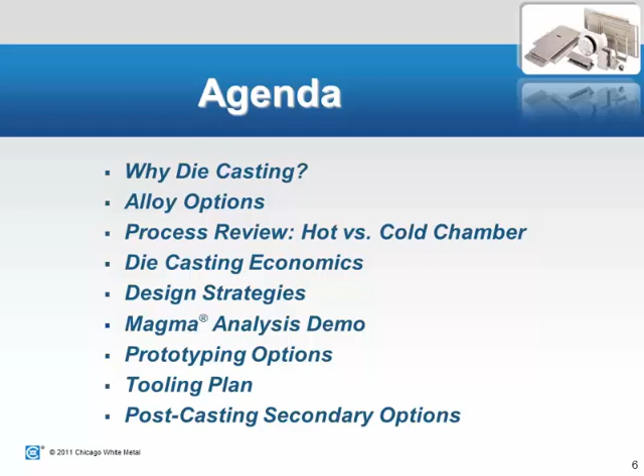If you look at why die casting, there are a wide variety of alloys available. The three main families of alloys that we talk about are aluminum, magnesium, and zinc. There are various alloys within each family that we'll look at a little bit, but those are the main three. There are other metals that can be die cast, but those are the ones that are overwhelmingly most common in the industry, so we'll talk about those.

They have a good range of physical and material properties. We'll look at some of those. We have links at the end of the seminar or webinar where we give some literature and documents about more specifics of the physical and material properties that we'll give you.

Die castings produce a net shape or as close as possible component. That's one of the biggest benefits of die casting versus other types of castings - investment castings, sand castings, permanent mold, those type of things. The goal for a die casting is to give you right out of the tool as close as possible the shape of the part and dimensions and tolerances you're going to need. The less we touch the part after it comes out of the casting, the better economically it's going to be for you.

A single die casting can replace multi-part assemblies. Another great reason to look at a die casting is if you have some sort of steel part or other assembly that has fittings on it that we can convert to a single part die casting. That is obviously a cost save all around and makes a nice part.

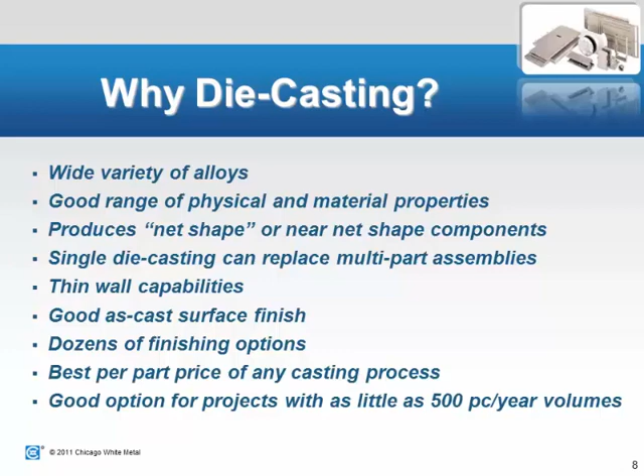If we look at the various material selections and alloys available, like I said, there are basically three families of metals that we talk about. Aluminum alloys - we highlight here aluminum 380, which is the one that Chicago White Metal works with, but there are numerous others in the aluminum family. 380 is the most common of all the aluminum alloys used in die casting, so we focus on that one.

Aluminum has very light weight, excellent strength properties, and excellent thermal and electrical properties. Many people use aluminum 380 for heat sinks and that type of application. And it is the lowest cost per unit of volume. We talk about cost here in a little bit, but when you look at the price per pound of aluminum and its weight, it becomes right now the best cost per unit volume alloy.

Magnesium. The magnesium alloy we have highlighted here is AZ91D. There are other alloys available, but this is the alloy that Chicago White Metal uses. It is the lightest weight of all the die casting alloys. It's about two-thirds the weight of aluminum, so about one-third lighter. It's a similar weight to most common plastics, so many people look at converting from plastic to magnesium if they need a little extra strength they can't get from plastic without much increase in weight. Magnesium is a great option.

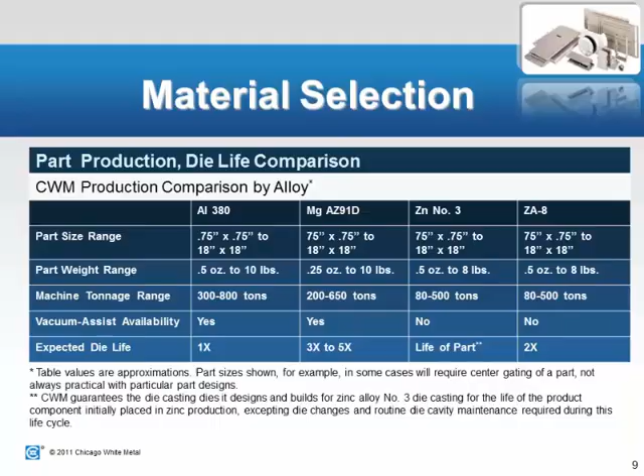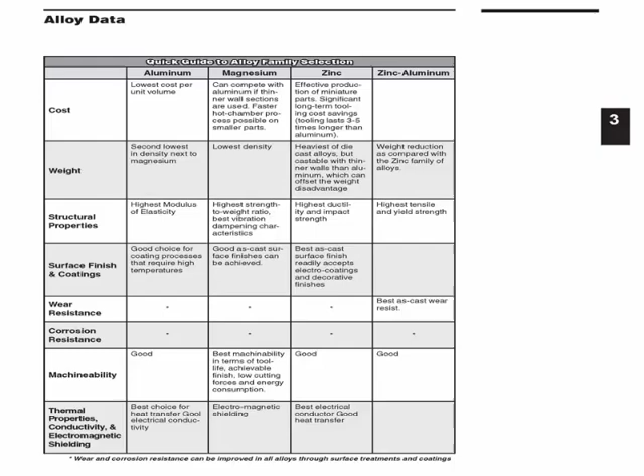This chart breaks down the various material properties of the alloys we talked about. This specific chart will be available to you, so don't worry about memorizing everything on screen. We'll send out a link at the end of the presentation with this exact chart, giving you all the different strength characteristics and densities of each alloy so you can compare them.

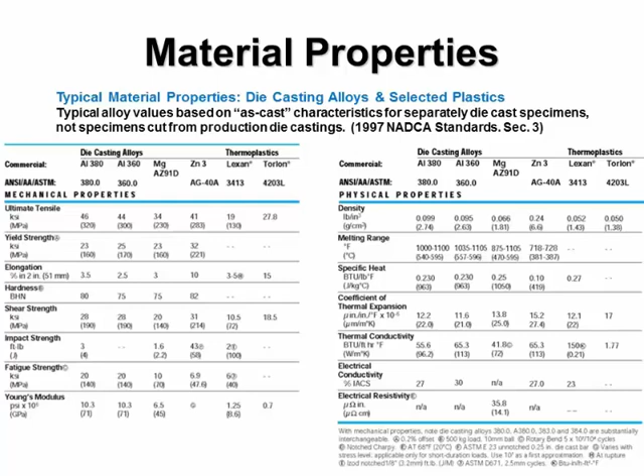Next, let's talk about cold chamber versus hot chamber processing of die castings. You hear these terms thrown around in the industry, so it's good to understand what they are and the differences. When we refer to high pressure, or die casting in North America, that relates back to the high pressure die casting process. It differentiates itself from other casting types like sand casting, permanent mold, and investment casting, where the alloy is poured by gravity and is not under pressure.

In our process, in the high pressure die casting process, the metal pressures can get up to about 20,000 psi. So when we inject the metal into the die, it's extremely high pressure, and that's what allows us to get the thin walls and the features as cast in net shape as we can. That's kind of why that lends itself.

The two processes we talk about are cold chamber and hot chamber. We have a little animated clip coming up that'll show this in motion, and you can see a bit different about the differences. The hot chamber process is used for the lower melt temperature metals, so zinc, ZA8, lead, which we don't cast but is there, and small to medium magnesium parts. Those are hot chamber applications. Cold chamber is for the higher melt temp metals, such as aluminum, brass, and the larger magnesium parts.

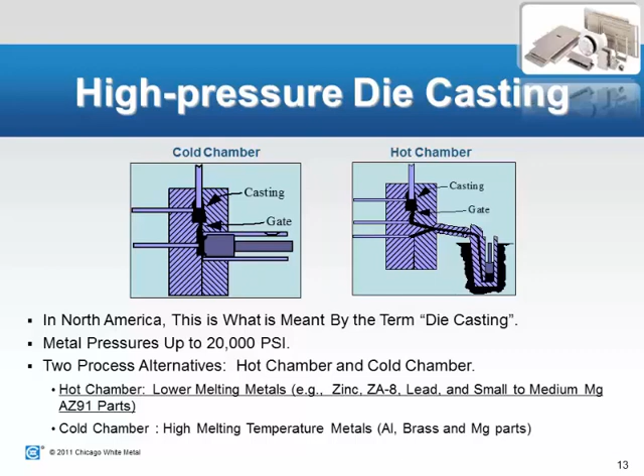Here you can see an example, or a pictorial, of the cold chamber process. Conceptually, it's pretty easy. You have an amount of, in this case, aluminum or magnesium for a cold chamber outside the machine. A ladle goes in and scoops a given amount of metal, pours it into the plunger area, and then it's shoved into the die at very high pressure. So conceptually, it's pretty easy to understand how die castings work. There are many other factors that go into it, but as you can see, the metal goes in, the part solidifies, the tool opens up, spits out a part, and is either ejected into a water bath or extracted and air dried on a conveyor.

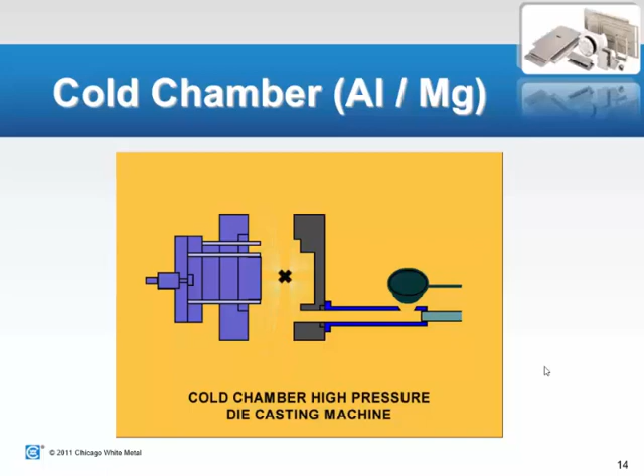Again, cold chamber die casting is for the aluminum, larger magnesium, and the ZA family of alloys that have the higher aluminum content, the 12 and 27% aluminum. Some of the advantages: it allows us to process larger, more complex parts in this process. It allows for higher metal pressures, which gives improved quality when we have heavier wall section parts, usually in the larger aluminum parts, as well as pressure-sensitive applications. There are times when an application will need to be leak tight or have an internal pressure, and the cold chamber process is an advantage for that.

Some of the disadvantages: there is a greater chance of entrapping air during the shot, and it's typically a slower cycle time versus hot chamber. So it adds to the economics of the process.

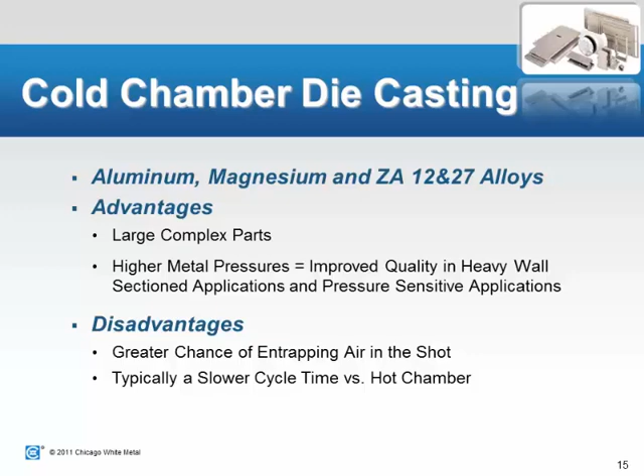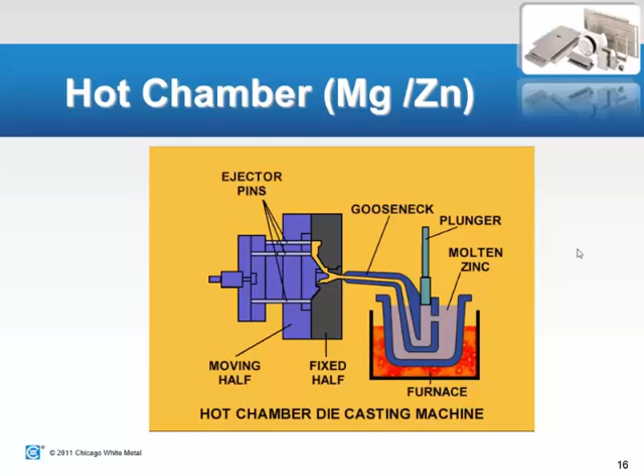The lower temperature alloys, such as zinc and magnesium, can run this way because it's not as aggressive on the injection system, and that's why it's buried inside there. But the rest of the process, from the tooling and how the part cycles in the tool, is the same. The biggest difference is, like I said, how the metal is physically brought from the molten area to the tool.

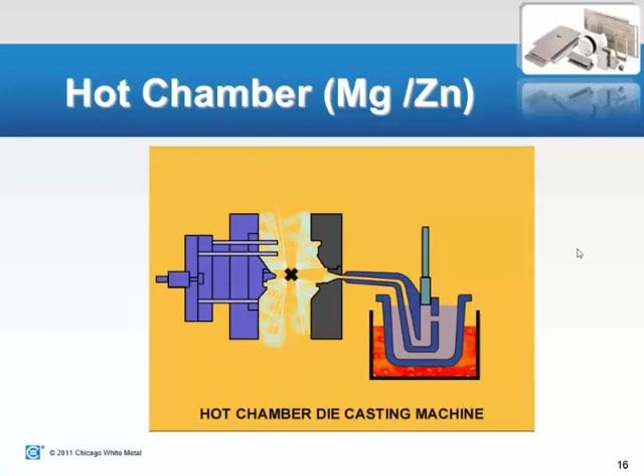So hot chamber die casting, again, it's for the lower melt alloys: the AZ91 magnesium, the zinc family of alloys, as well as the ZA8, which is the 8% aluminum alloy. So it doesn't have enough aluminum to push it to the cold chamber.

Some of the advantages: we're able to control the metal temperature better, improve filling capability of the thin wall castings, reduce porosity because of the way that it enters the tool and is able to fill the thin wall. We're able to control porosity better. And as I mentioned before, it's typically a faster cycle time than the cold chamber, which helps with the process costs.

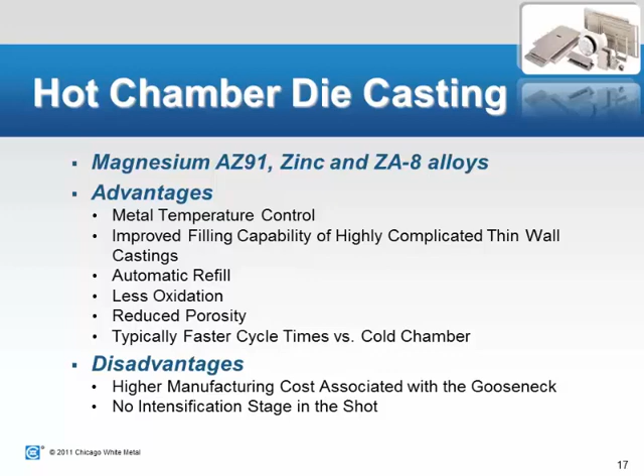Some of the disadvantages: the gooseneck that you saw in the animation, which is the mechanism from which the metal gets into the die, that system is a little more expensive than the cold chamber setup, but not significantly. And there's no intensification stage in the shot, so we're not quite able to get as high pressures as it goes in.

Some of the price factors that go into making a die casting. These are what go into it when we build a quote for a customer. Obviously, metal costs: each alloy that we talk about has a different price per pound that fluctuates throughout the year. We show a snapshot of that coming up in the next slide. The processing costs, the labor amount goes into it. The size machine that we're running a die casting in will add into the overall cost. The various cycle times for a component.

Some of the larger parts with thicker walls and that type of thing might have a significantly longer cycle time than a smaller application. The number of cavities that go into the tool also matters. If it makes sense to put 2, 4, or more cavities into a die, we can do that, and that can save on processing costs as well as automation options.

The casting process is relatively automated, and we try to maximize that as much as we can.

The post-processing costs, again, are varied. The part comes out of the die and goes down a conveyor, and then has to get the gates and runner system trimmed off in a secondary operation, so that factors in. And then there's the various finishing that's available.

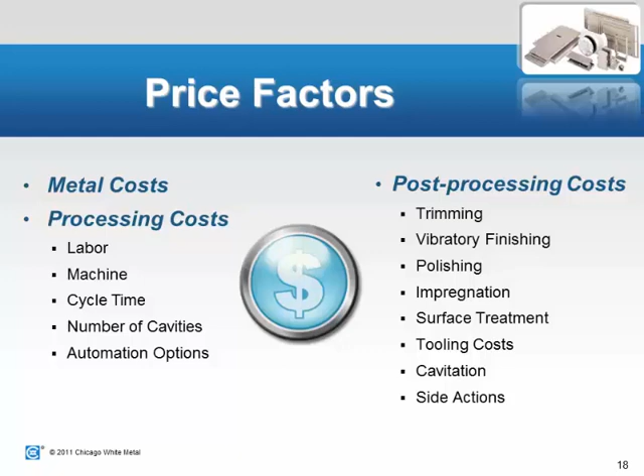We show the larger bar as the actual cost per pound of the alloy itself. For magnesium, right now the cost is about $2.25 per pound. Aluminum is about $1.25 in that area, and zinc is about $1.05.

So that means something, but it doesn't mean as much as when you factor in the cost per cubic inch or the cost per unit volume. So that's why we show a second bar here that shows, when you factor in the density and actual weight of the alloy, how that comes out.

With the metal prices as they are right now, aluminum is slightly better than magnesium for cost per cubic inch, as you can see by the two bars. Zinc is significantly higher cost per cubic inch because, as we mentioned, the weight of zinc is about 2.5 times that of aluminum. So there are things we try to do to factor that out.

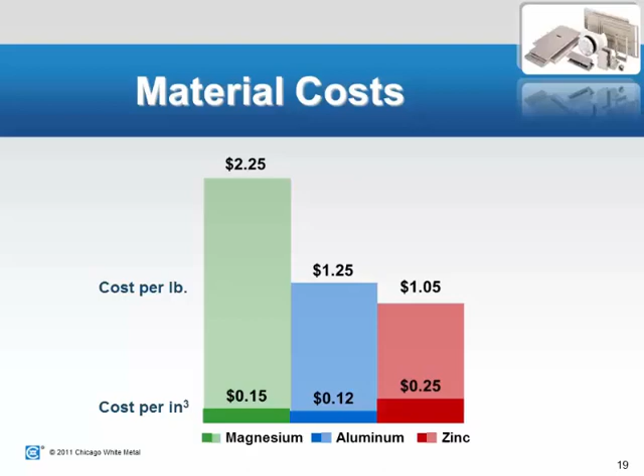If we can design out some of the wall thicknesses to make them thinner, that will help with the zinc cost per cubic inch part of it.

So now if we go through a few case studies of projects we've worked on in the past with customers to show the benefits of die casting. In this picture, you can see a manifold type part.

It started life as an aluminum and brass assembly. You can see where the aluminum part would have been, and then 5 or so different fittings that were brazed in place. So it was a pretty costly assembly for this customer.

When we worked with them, we tried to see if we could convert this over to a single piece zinc die casting, and that's what we ended up doing. All the threads that you see here are as cast.

There's most likely a small flat area that we have to include in order for the part to get a gate there. Maybe not on some of these, but typically we'll put a flat in an area so we can gate into the thread. But external threads are an option, and that allowed us to make this part as a single piece die casting.

Obviously, it was a huge cost save for the customer, saved about 85%, and the payback on their tool was very, very fast.

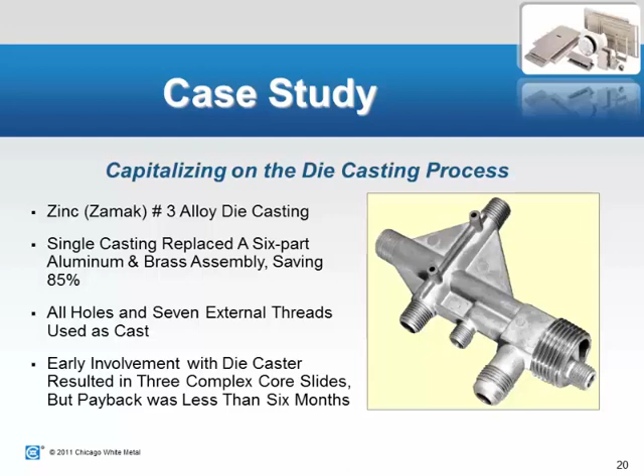This next component was a printer - a printer cartridge, printer carriage component that started out as a plastic piece with some threaded inserts molded in. The customer indicated that the overall strength of the part was not exactly what they needed, but they didn't want to sacrifice very much weight in the overall product by converting to something.

So magnesium was a great choice for this. It gave them the strength they need. The weight did not change that much. They could remove all the different brass and steel little inserts that you can see in the plastic part, and that allowed a good cost saving as well.

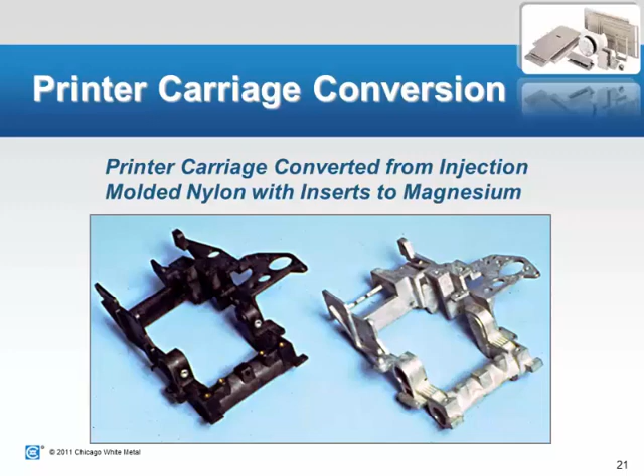This next conversion case study involves very, very small air chuck screw machine brass parts that were converted over to what we call mini zinc die casting.

There's a whole separate process surrounding the mini zinc process. These components are run in extremely small, extremely fast die cast machines. In fact, these parts probably run something in the 20 to 30 cycles per minute range, so very, very fast. These things are spitting out almost like popcorn out of the machine.

So it's a great option for parts that are small. Obviously, these parts have to be small to run in these machines, and there's a lot of conversion activity if you're screw machining brass like these parts were, or steel or other things that can be converted to zinc. There's usually a very significant cost save to do that. In this case, the annual savings on these parts were about $85,000, so very significant.

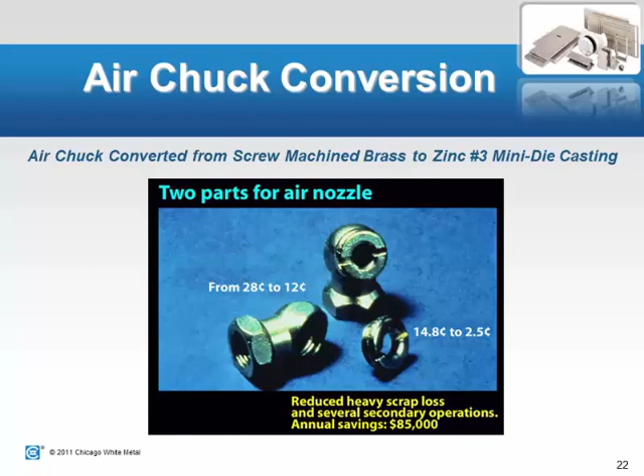This next application is a microwave splitter. It is a very low volume requirement part. It started life as a machined from solid part, which you can imagine with all these internal features and different things going on, that was a challenge and very, very costly to do as a machined part. Converting it to a die casting, even though it required several pretty complex slides to form some of the features and some post-casting machining to touch up some of the features, it still was a significant cost savings over machining from solid, and allowed the customer to see a payback on their tooling investment in very, very fast order, even though it was a small quantity that they needed per year.

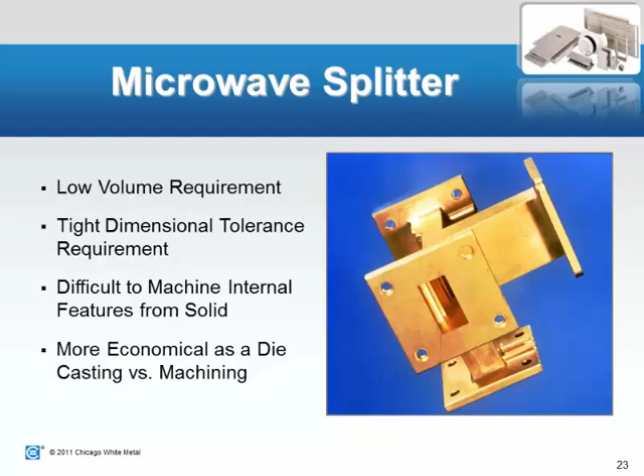This next project, you can see it's a handheld or shoulder-mounted video camera. This highlights the number of components that were used in this application. There were 11 die-cast parts that were used. You can see the non-coated parts in here. The more structural parts are aluminum, and the majority of the exterior parts are magnesium.

Most of the parts, or 5 of the parts, were cast net shape, so there were no other secondaries required on those. Some of the other parts received some drilling and tapping, but for the most part, as they came out of the die, was good enough. The outside components that are magnesium were mostly specified that way because of the EMI shielding that were required for this application, and the magnesium did a great job of providing that.

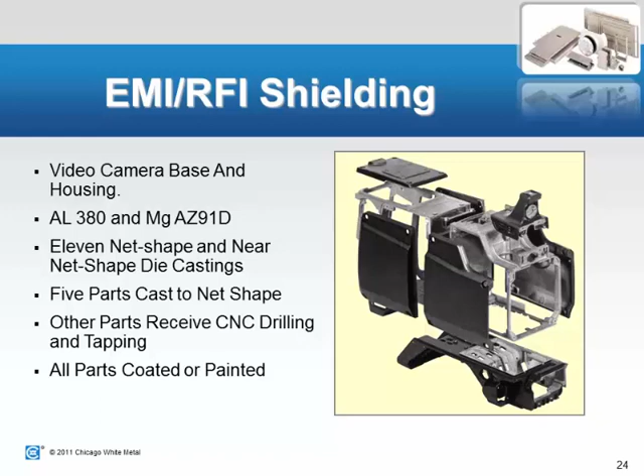Okay, if we look at some of the die-cast tips or design tips that we would recommend, again, these are things that we look at when we first get a project, and they may seem a little simple, but they actually can have a big impact on the price and quality of the part.

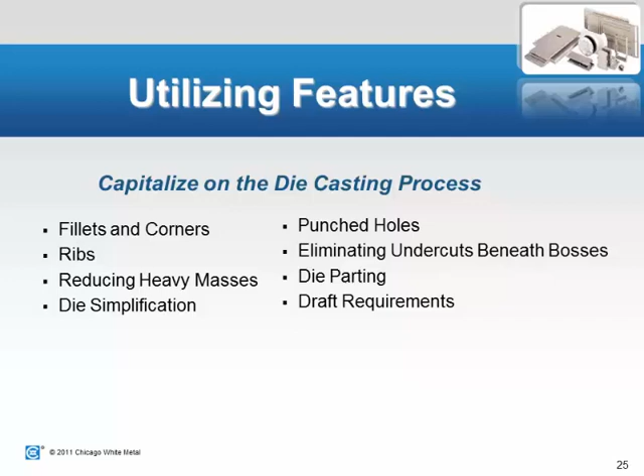The first thing we look at when we get a new project in is are there areas that we can remove some of the mass of the material. You see in this diagram on the right, there's a boss that comes in, and then there's a heavy wall section that's underneath the boss. Heavy sections are areas where porosity may creep in. It also adds unnecessary weight, which is cost into the part. It causes us to have a slower cycle time in the tool, which again factors into the cost. So if there's any areas that we can recommend a customer take out weight or do some things to reduce some of the overall weight of the part, it's a big advantage all around.

Die castings don't necessarily have to have a consistent wall thickness throughout the entire part, like plastics or other things are recommended to be. But it's still a good policy if that can be done, that's great. It leads to a little better metal flow and some other characteristics that are an advantage.

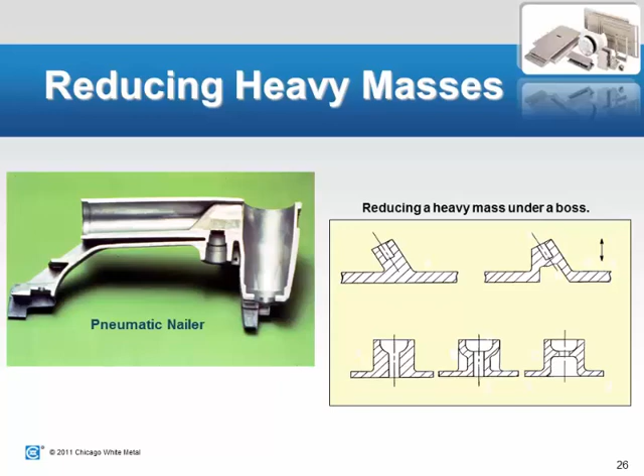Again, in this slide, we try to ask a customer to use ribs wherever possible instead of maybe a heavy mass area. Ribs do a couple things. They help metal flow from one section of the part to the other. They also increase the strength of the part as it comes out of the die and in application. So ribbing is a good thing for die castings wherever possible.

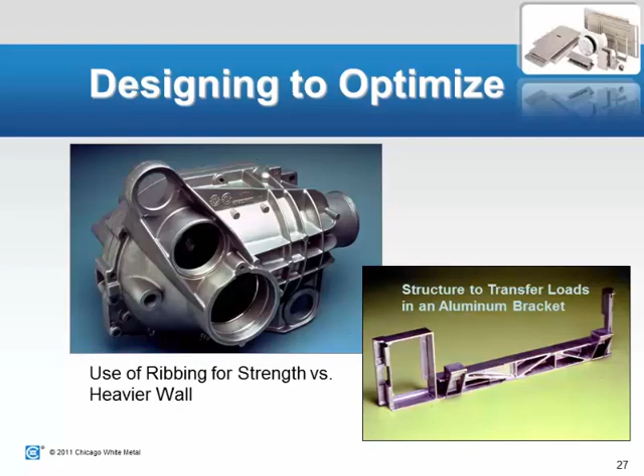Fillets and corners, again, that seems like a simple thing, but you'd be surprised how many times we get an application that has very sharp corners or very little radii in the corners, and that's bad on a couple of levels. First, it could create stress points on a component and lead to premature failures. The biggest thing for us is that being able to have generous radii in the corners allows the metal to flow better. When liquid metal goes in and tries to fill a cavity and solidify, it does not like to try to do that around a sharp corner. So anywhere there can be radii factored in is the best.

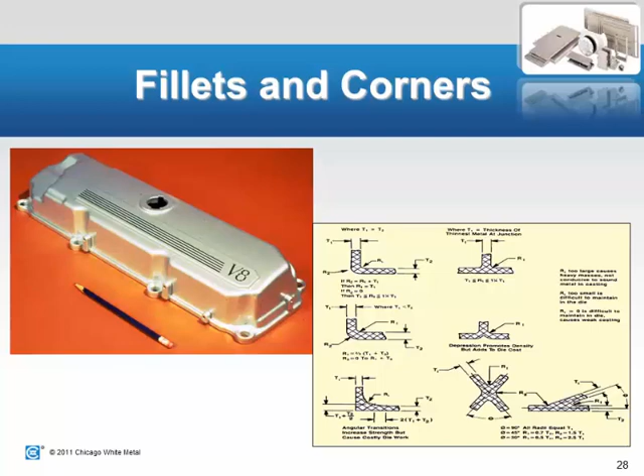Draft is another thing that we'll look at when we first get a new project in.

Draft is going to be required on pretty much every feature that we need in a die casting. What happens is, as the part solidifies, the metal will shrink toward the inside of the part and onto a tool. So we will need some draft on the features in order to get the tool apart and to eject it from the die.

Interior features need about 2 times the draft of exterior features. So as a general rule, we'll ask for about 2 degrees of draft per side on the interior features of a part and maybe 1 degree on an external feature. Obviously, more the better for us to properly get the tool apart.

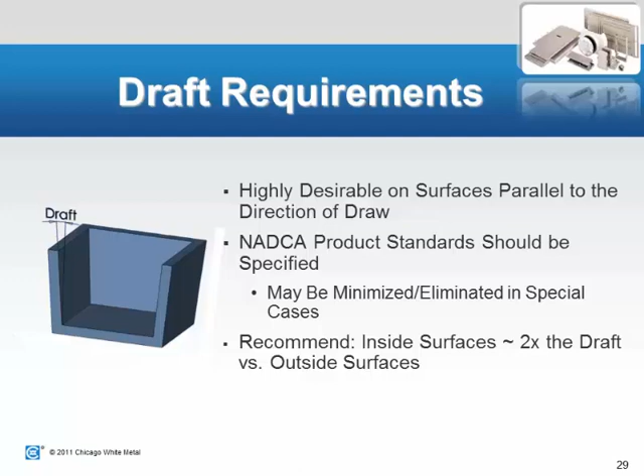Sometimes customers are limited on what they can do from a draft standpoint, which we understand, but we do request as much as you can give us. There are areas or times where draft may be minimized or even eliminated. Those are kind of special cases, but there are times when that's something that needs to be done.

Prototyping strategies - another common question we get is, how do you prototype a die casting? Obviously, people don't want to spend the investment on a brand new tool just to get some prototypes. So what are the other options that are available?

We can do a single cavity hard tool. What we mean by that is, if there's going to be in production, say, a large 4-cavity die, maybe we make a very small single cavity die instead in order to get some prototype or maybe even some pre-production parts off of it.

We can also do a single cavity soft tool. We can utilize a tool steel that's not hardened up to what we would use in production, and that's typically good for, say, a couple thousand parts, maybe a little less depending on the application.

Rubber plaster molding is another great option that we suggest to people when you need maybe 10 to a couple hundred parts. That's a fantastic option. There are companies out there that we work with and recommend for that process.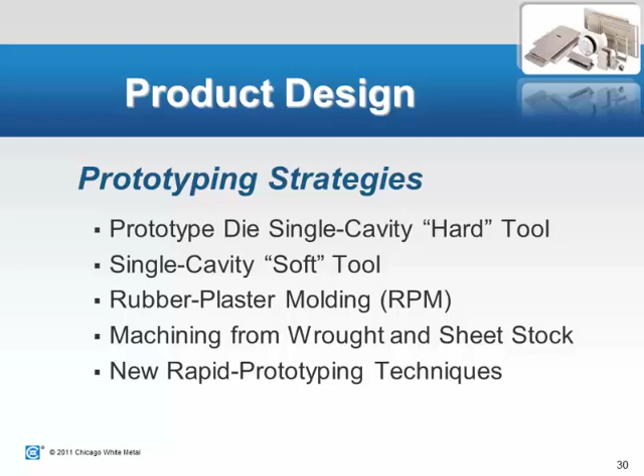There's machining from wrought and sheet stock. This is usually done for smaller quantities. If you just need a couple of parts to touch and feel and show around, then that's a very good option. And we're also looking for new rapid prototyping techniques - there's always new things coming up, and so we try to stay on top of the new things out there.

If we consider what the tooling construction cycle is, as we get a new project in and we are working with a customer, once we get the final model from a customer, we'll construct a rapid prototype called an FDM, Fused Deposition Model. It's a machine we have in our engineering facility in Chicago, and it's great to be able to just make something very fast, to show to the various departments that are going to be touching the part, and to show to outside vendors if necessary what the part's going to look like.

It's very helpful. We'll then perform a design review with the customer, going back and forth on tolerances and anything that might be able to be changed or modified to help the part or solve some issues that we can solve ahead of time. Then we go through a MAGMASOFT flow simulation on every new project.

In a minute, we'll show you a case study of MAGMASOFT and the advantages we see of this. Again, we do this on every new project. It's not something that's typical in the die-cast industry for other die-casters to do on every project, but it is something that we find extremely valuable and recommend for every new project.

Once that is all complete, we'll subcontract a tool maker. We do not build dies in-house, but we've got a fleet of people that we utilize to build our dies, both domestically and offshore. We'll then do a tool design review with the customer to make sure that they're happy with how the tool is designed.

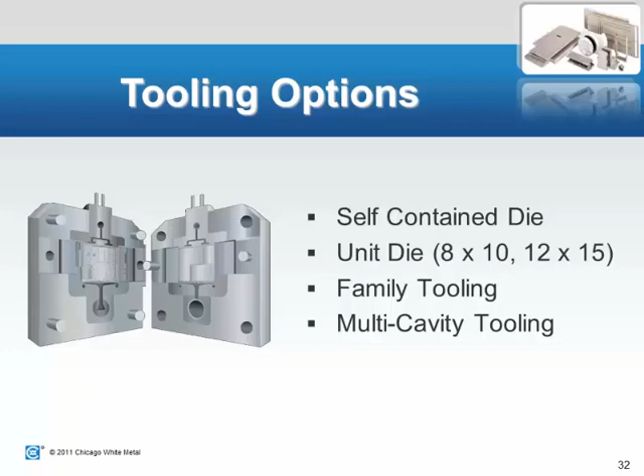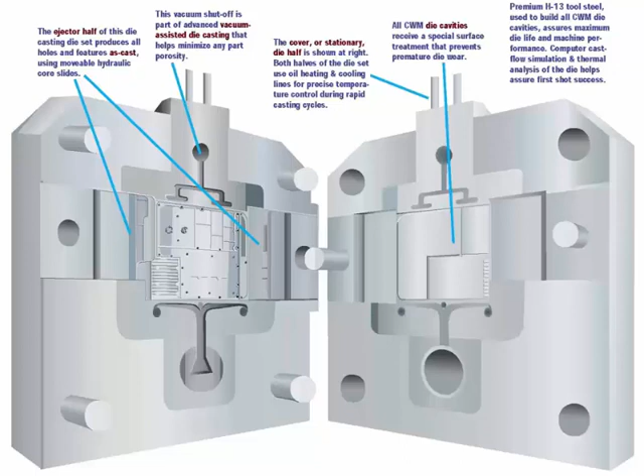Internal porosity is obviously a big thing that's desired to be controlled, so we do whatever we can to achieve that. The tool steel that we use is H13, which gives us the maximum die life and machine performance that we can achieve.

All of these exterior holes that you see, we attempt to get as cast, depending on size and functionality, instead of having to go in as a separate secondary operation. Any type of indications such as part numbers and logos and that type of thing are easy enough to put in the tool ahead of time, so those can show up on your part as well.

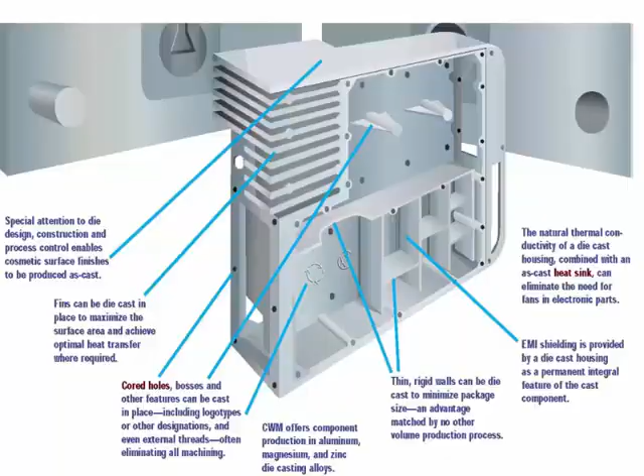Okay, next we'll step through a MAGMASOFT case study. As I mentioned, once we get a new project in, we'll work with the customer to go through this MAGMASOFT project or analysis with them.

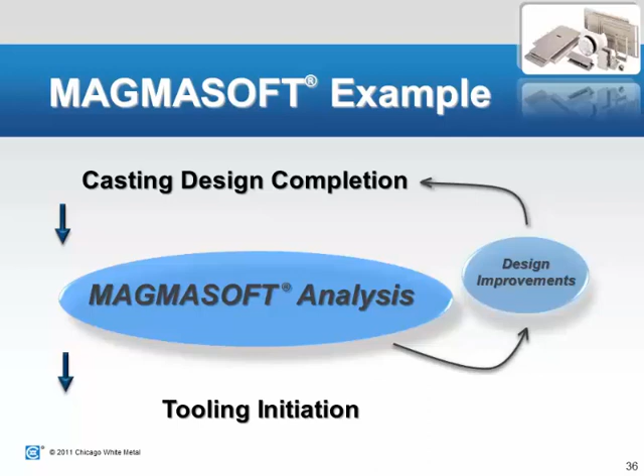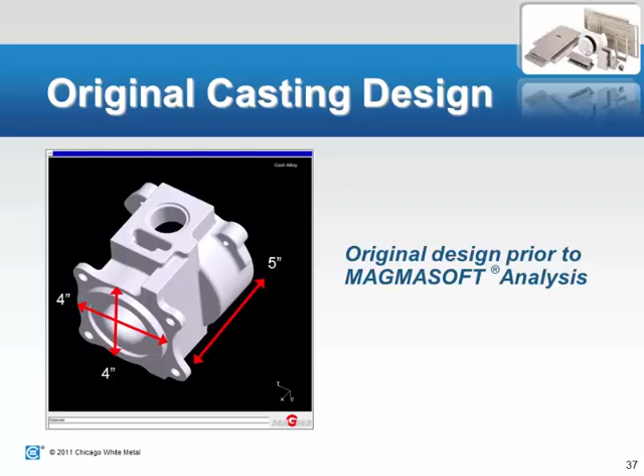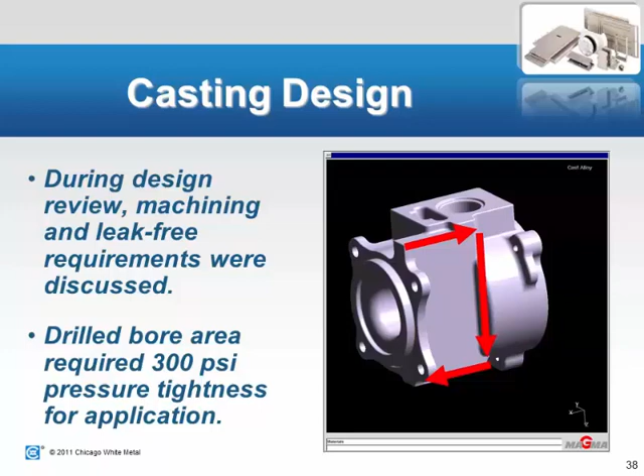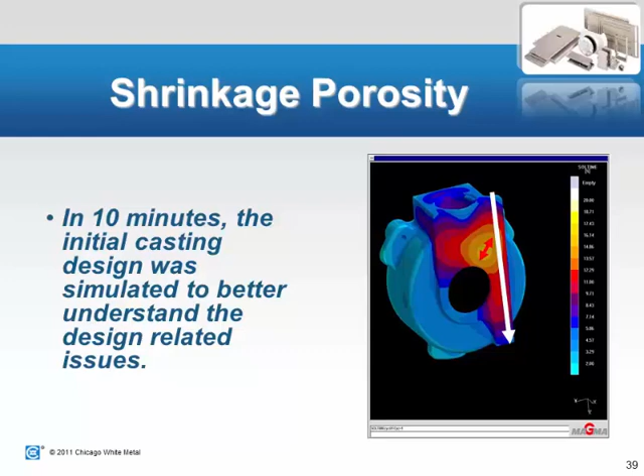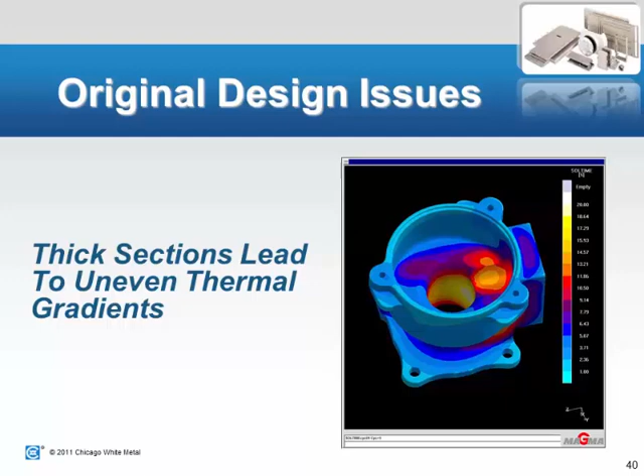Another view of the part from above, and you can see again the thermal gradients based on the thick wall sections. The uneven thermal gradients lead to distortion, and that distortion can lead to stresses that remain in the part after it comes out.

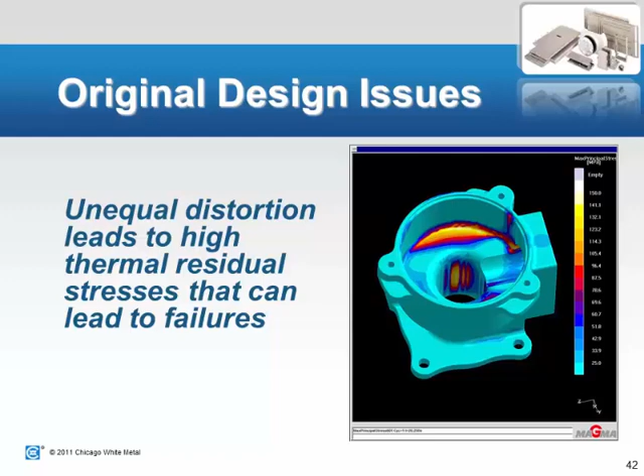So the things that we did to work with the customer to try to redesign and improve on the design, as you can see in this slide, there's some metal taken out in a couple different areas. You can see this section on the left where my pointer is, that was completely solid, and then we came back in later after the analysis was completed and put a long slide in there that took a good bit of material out, as well as a slide from this direction which took

another big chunk out. The other thing we did was where the bore for the pressure tightness was going to be positioned, instead of machining that completely out, we cored out the majority of that first in the die, which was a big advantage.

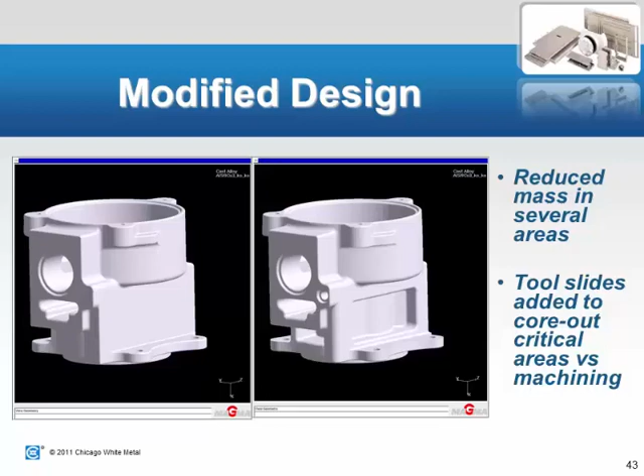So when you see the results in this slide, no longer do you have the bright yellow and red areas. It's a much more even solidification picture. So the entire part is solidifying fairly consistently.

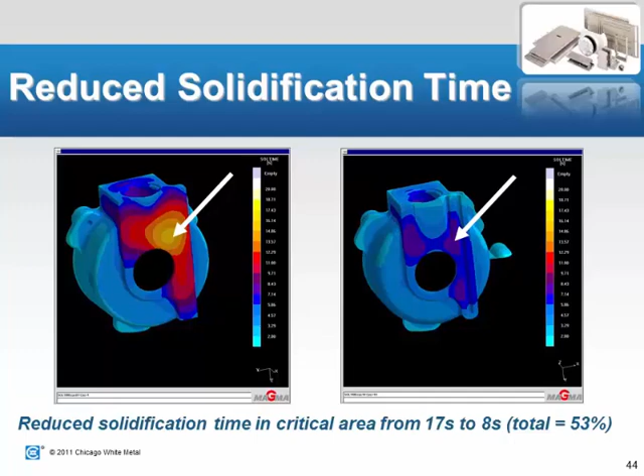The next slide shows what we do after we got the design completed and finalized. The MAGMASOFT software helps us identify the best way to gate the part. As you can see, the metal's flowing in and then gets split off in a few different areas to help fill. And then once the metal gets all the way to the other end, it gets pushed out these little small overflow areas that are here. So all the entrapped air and other undesirable things that happen during the shot are pushed out to the end.

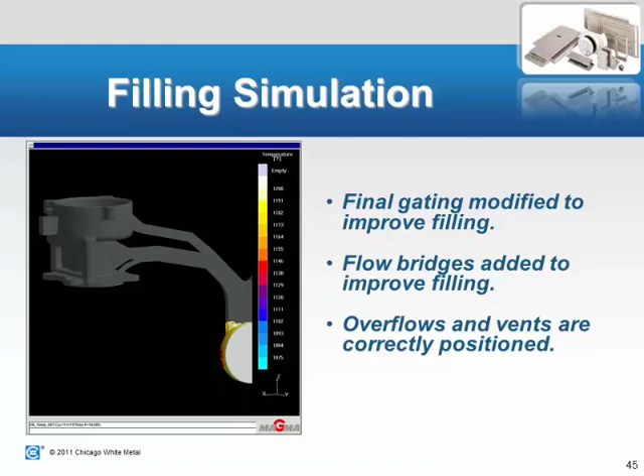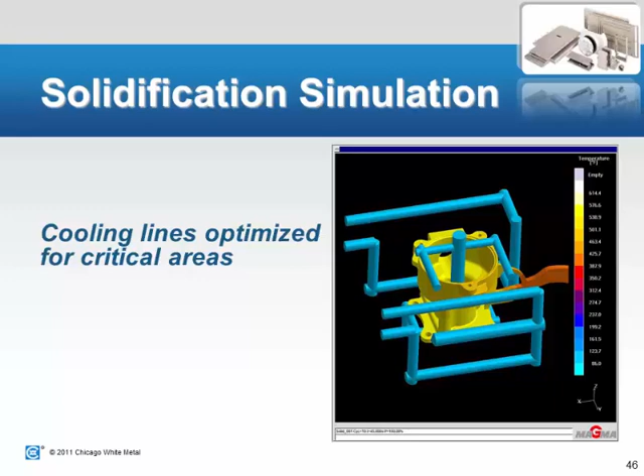In addition, the MAGMASOFT helps us identify where the cooling lines are going to be located and optimizes that for the different areas of the part. If there's some areas that are thicker or require more cooling, then the system helps us identify that.

So in conclusion, obviously initially we saw the issue with the pressure tightness requirement in that area. The complete analysis fit inside the 2-week engineering and design lead time frame that we typically give for a MAGMASOFT process. And the first castings right out of the chute were good and have had no defects to date. So as you can see, it's a very, very powerful tool that we utilize, and which is why we try

to do it on every project. It's a huge advantage being able to identify things up front instead of having to wait till the tooling is completed.

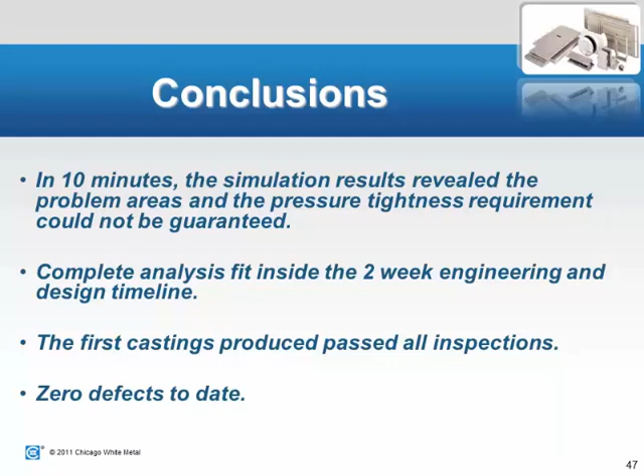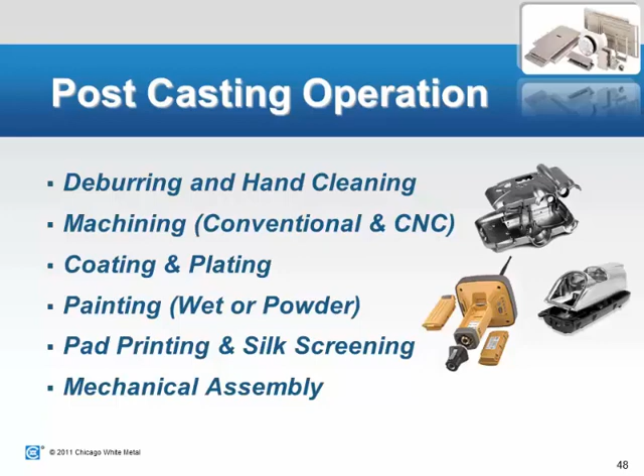The various surface treatments that are available, we don't go too deep into what is available in this webinar. We're looking to provide you some technical data sheets after the webinar is completed that will have details on other options that are available for surface treatments. In addition, we're looking to potentially have a separate webinar just on surface treatments. I know that's a very hot topic for a lot of the people attending, and we're looking into that.

Obviously, surface treatments provide a decorative finish based on whatever the cosmetic requirements are, as well as providing a protective barrier for the different levels of protection that are required. Some applications are fine as cast - the application does not need any coating - but the majority of parts do get some sort of coating.

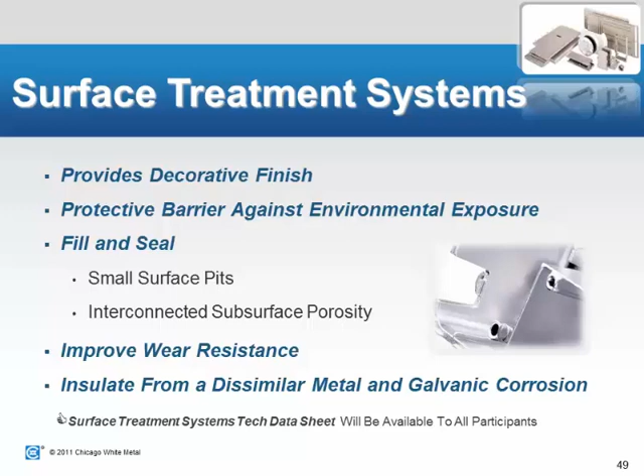And again, we'll provide some other information to you. For surface treatments, the best thing to do is really give us a call. We'll kind of step through what's available. We'll look at the application with you and see what you're trying to get out of a part, what the cosmetic requirements are, what the corrosion protection requirements are, and we can really work with you with providing samples and other options that'll get you something that you

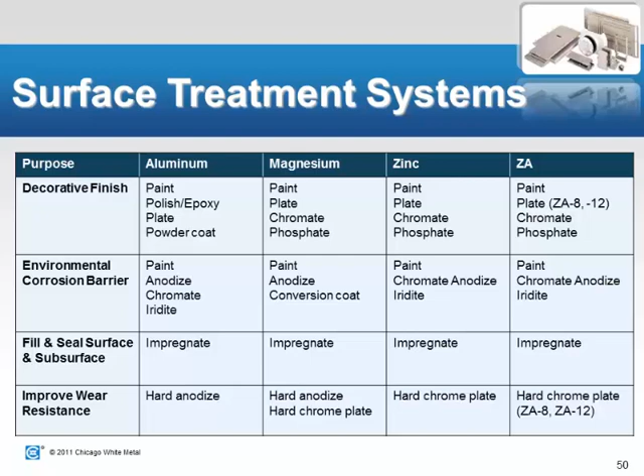need. Okay, now we'll take a few minutes and just look at Chicago White Metal Casting specific capabilities. We've been in business since 1937. We're a private family-owned company.

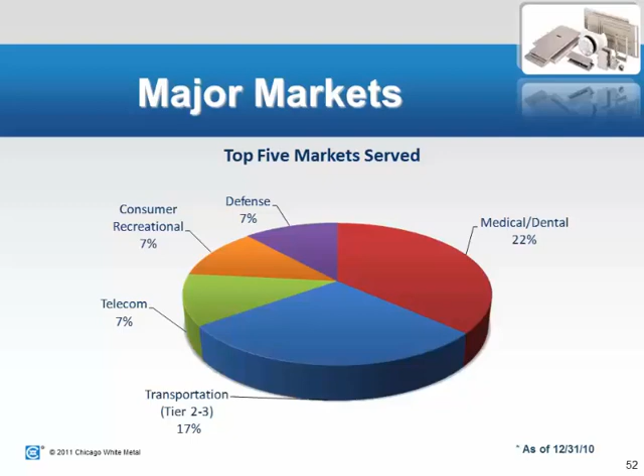It really spreads out from there as far as other industries that we support - lawn and garden, you name it, there's probably parts that we make for it. From an existing client base aspect, we have about 300 active customers right now with about 600 different active parts, so you can see it's a pretty large amount.

Our largest customer is less than 15% of our total revenue of about $30 million. So we try to keep it as evenly spread out as we can and not get too involved with one specific customer, for obvious reasons.

Some of the registrations that we have: we are ISO 9001 registered since 1995. We are also ITAR registered for any military projects that require it. We are ISO 14001 registered - we're the first North American die caster to achieve that. We're also working with the EPA on a couple of their performance track programs.

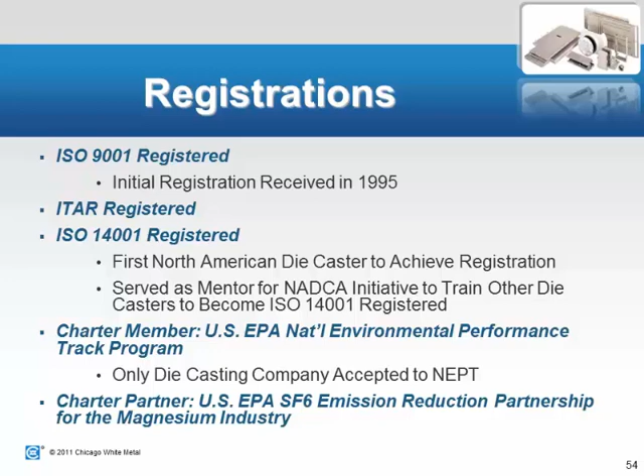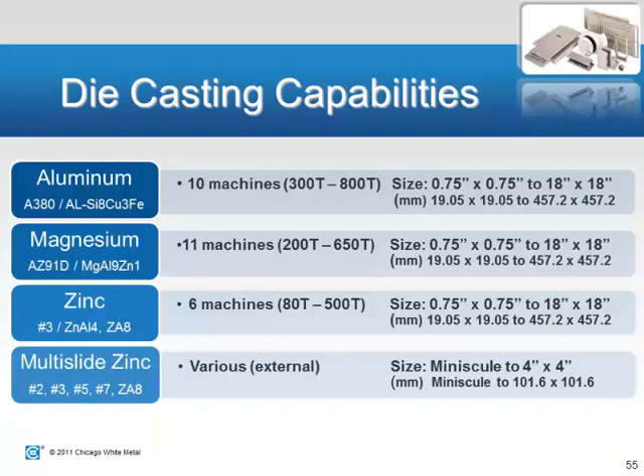From a machining standpoint, we have 28 machining centers in-house in Chicago. We can do both machining of the die castings as they come out of the die, as well as potentially support you if you have a project where it's just going to be machining - not a die cast application, but a production level machining need we might be able to support.

We also can support prototypes in our machining department. If there's a project you have a prototype need that makes sense doing it as a machine part, we can work on that with you as well.

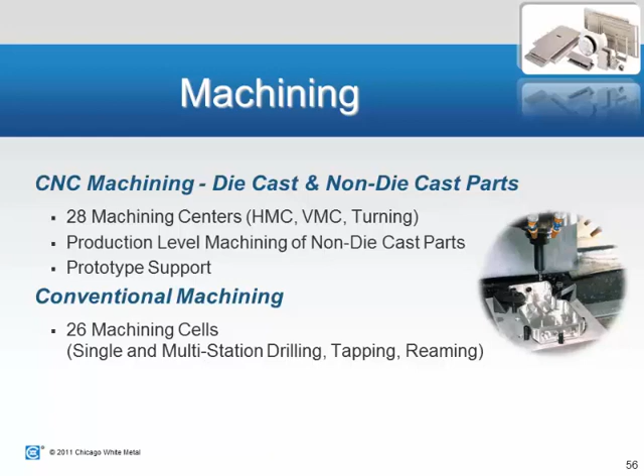Also, from a contract assembly standpoint - I mentioned if a customer comes to us and says, hey, you're making a die casting for us, but we've also got these other components that it might make sense to come in with already pre-assembled, we're more than happy to do that. We work with all types of different mechanical components. We don't do really any electronics assembly, but really anything mechanical we can help you out with.

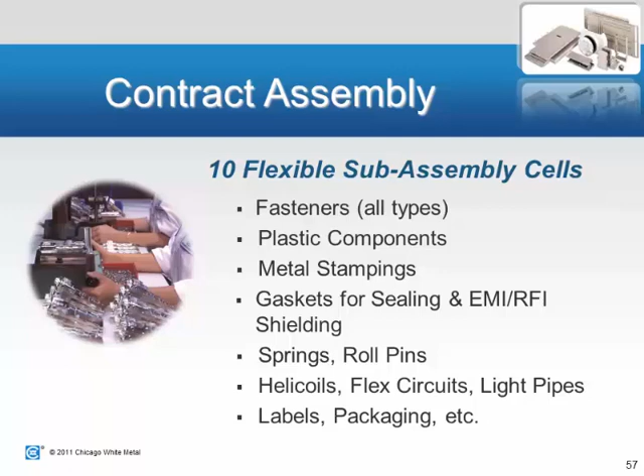Finishing options, again we talked about that but not in depth - there are dozens and dozens of different options, from deburring and blasting, and different options. Again, pad print and silkscreen graphics, as well as some other operations that we can work on.

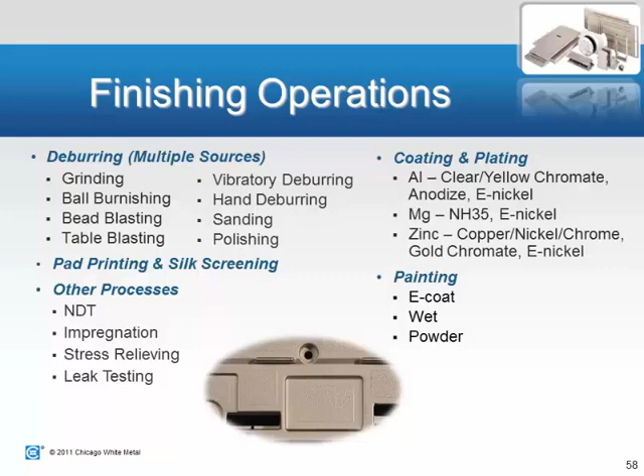So toward the end here - why Chicago White Metal? We feel that we're not necessarily a die cast company that also machines or plates, that type of thing. We feel like we have competency that spans all of them.

So we feel that from a product design standpoint, we can help our customers work through the design process, which includes up to creating 3D models of your part, if that's something you'd like for us to perform. Obviously the die casting, machining - CNC and conventional - the various coatings we work with and can help with, and the assembly. So we feel all of those are our key features and capabilities, and that's what stands us apart.

Very good customer support that we have for everybody. Again, we've been in business for almost 75 years now, so we have experience for quite a while. Most of our management team sits on various industry committees - NADCA, the North American Die Casting Association, and the International Magnesium Association - we sit on various groups with them.